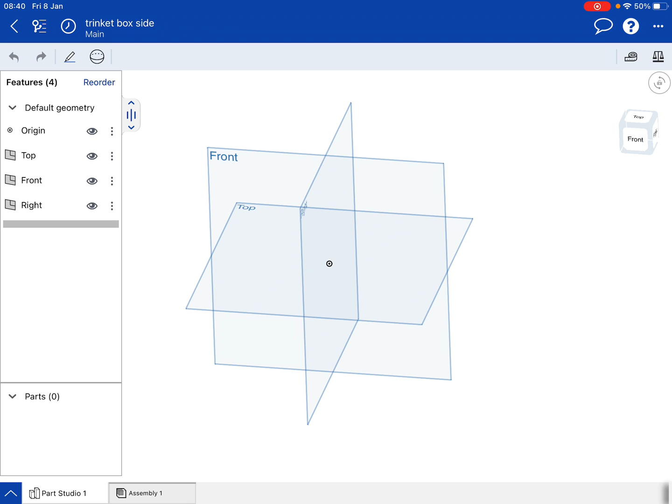Click on OK. I've not done this on the iPad, so it's a learning thing for me as well. Okay, so we've got our default geometry that we can spin around. I'm going to start by selecting the front work plane and then clicking on the sketch tool. So I'm now doing a sketch on the front work plane.

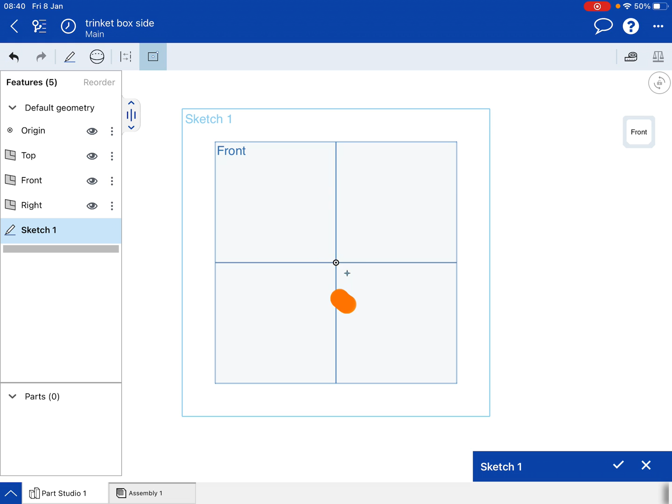I'm going to swing the view by clicking on front, so I'm looking directly at it. I'm going to start by drawing a box from the center using the center point rectangle tool. With the iPad you have to move the cross to the little dot that's right on the center, let go, and then drag out the shape.

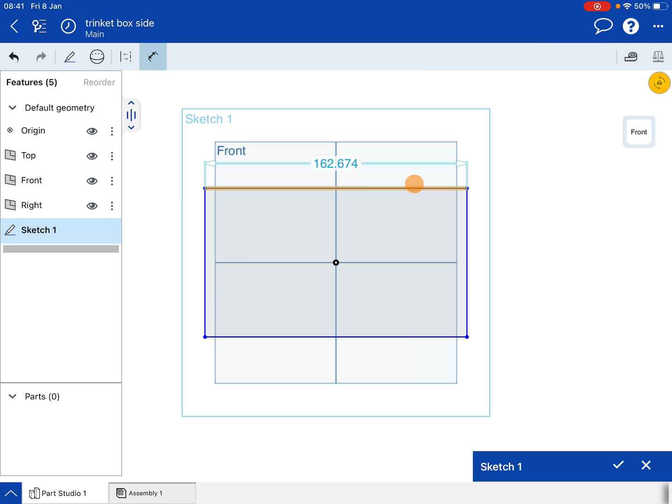Now the difference between the iPad and the PC is that you don't get the dimensions straight away, you need to dimension them next. So I'm going to go back to my pencil icon and choose the dimension tool. I'm going to click on the top line, and that gives me the dimension above it, saying 162. Click on that once and it gives me the dialog box so I can change it. We know this has to be 120 millimeters. Green tick, and there it is.

I'm then going to click on the side line here, and that comes up with 68.124, which isn't bad considering I wanted 68, so I'm quite close, but I'm going to click on that. Again the dialog box appears, change that to 68, green tick, and there we have it.

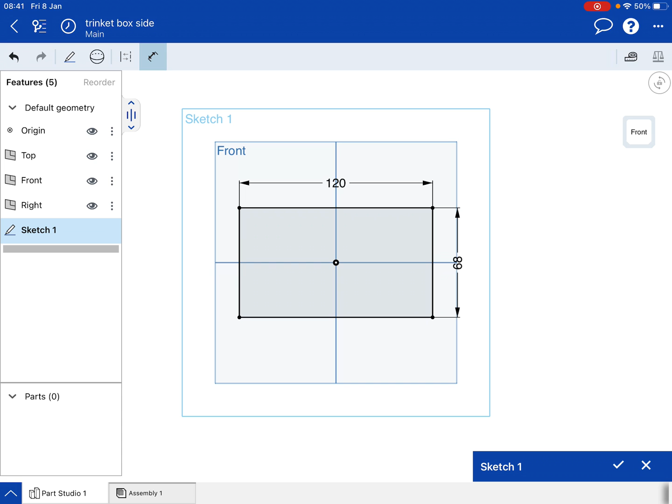Okay, the object's dimensioned. I'm going to zoom in so I can see more clearly, and drag this over so I've got it more central. There we are, okay, good.

If you find the toolbox on the left-hand side is in your way, you can click on that button on the side, and that should move it over so you've got more space to work with. Okay, so now we want to actually draw the teeth for our object.

We're going to start by drawing a construction line to give us the spacing of the depth of the teeth. I'm going to go to the pencil icon, choose the line tool, but also choose the construction line tool, which is the one next to the circle here. So I now have two tools selected. I'm just going to draw a line going vertically from there to there, and that's drawn.

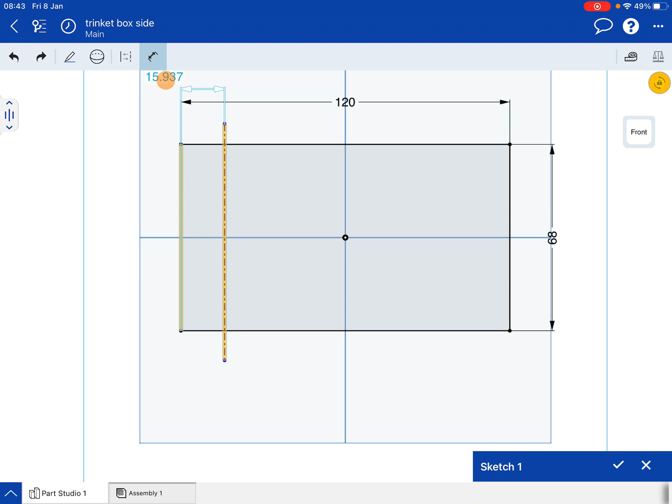What I don't know is the distance from the edge, so I'm going to go to my dimension tool. Click on the outer line, click on the construction line - oops, that didn't work, let's try that again - there and there, that's it, and there I have my dimension, telling me it's 15.937. Click on that tool, change that to 14, green tick.

Okay, now I'm going to use my line drawing tool to draw some vertical lines. I'm going to do one roughly in the middle, so from there to there. Click off the tool, click back on it, so it's like pressing escape on the PC. There and there, and I'm going to do one in the middle as well, so there and there. Okay, brilliant. Right, now I need to know the distance between each of the teeth.

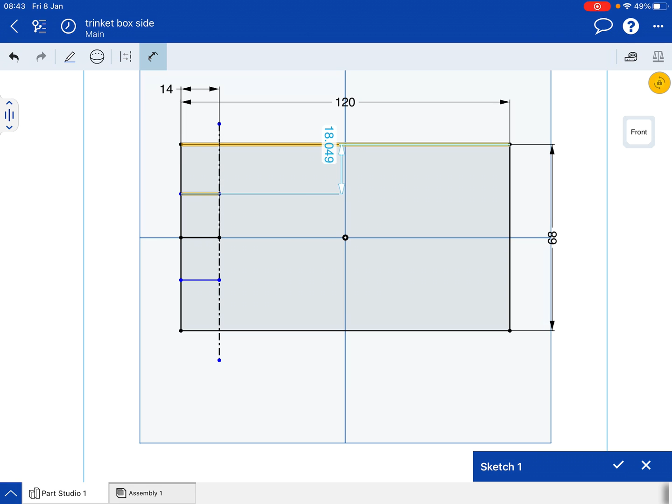So I'm going to use my dimension tool again. Dimension from that top line to the middle, to that line there. And that's telling me that's 18.049. Let's change that to 17.

Green tick that. Then do the same dimension for the bottom line to the one above it there, drag that over and click on it. And that is 17 as well. Remember, it's 68 divided by 4, so 17 plus 17 plus 17 plus 17 gives you your 68.

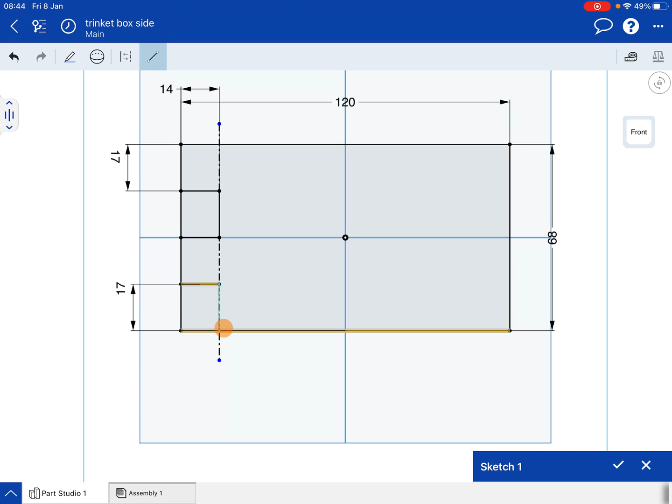I'm now going to add some extra lines in this, so take my line drawing tool, and I'm going to fill in the middle here, coming from the first tooth down to the second, to the mid tooth, from there to there, and from the top of the bottom tooth to the end there, because now I can chop out sections that I don't need.

So click on the pencil, click on the scissors, which is there, trim, and then lose lines that I don't need. So I don't need that line there, and I don't need that line there, and I also don't need that line there, so that can go away. Brilliant. Okay, so I've got one side of my tooth created.

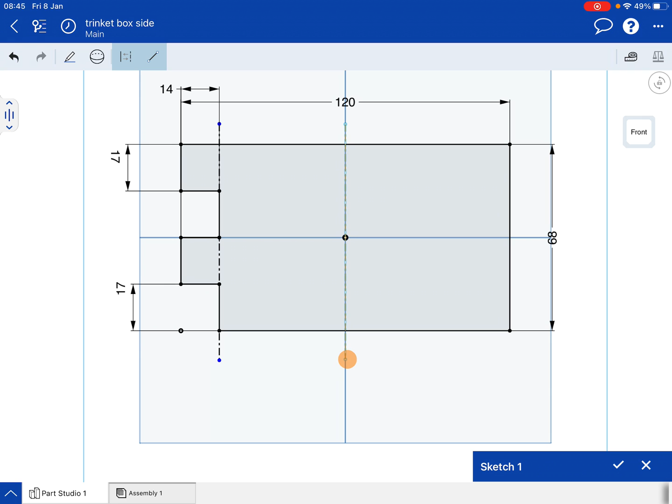I'm now going to go back to my line drawing tool and pick the construction line. I'm going to draw a line through the middle from under 120 down, there to there, going through the center. This is going to act as a mirror line, so we can mirror the objects on the other side.

So I'm going to click on the pencil icon, choose the mirror tool. Let me find the mirror tool, which is, where is that? I can't see the mirror tool. Oh yeah, the mirror, there we are. Select the mirror line, which is the center line that I've just drawn, there. And then select the entities that I want to mirror.

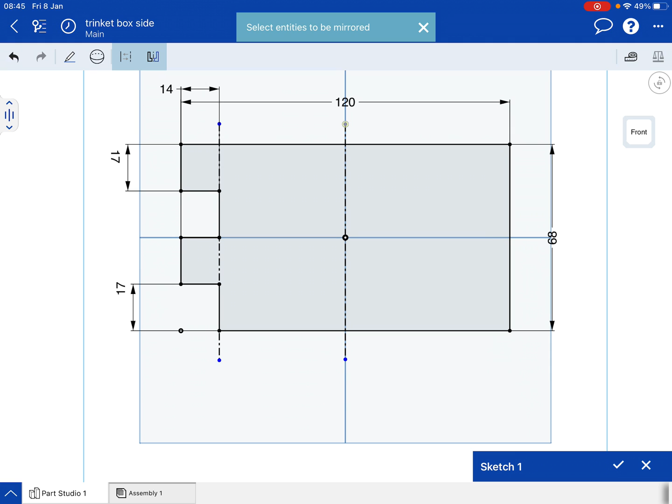So I'm going to mirror the horizontal lines that I drew, one there. Oops, hang on, mirror line there, that's it. And that line there, and that line there. And I'm also going to select the construction line that we drew there as well.

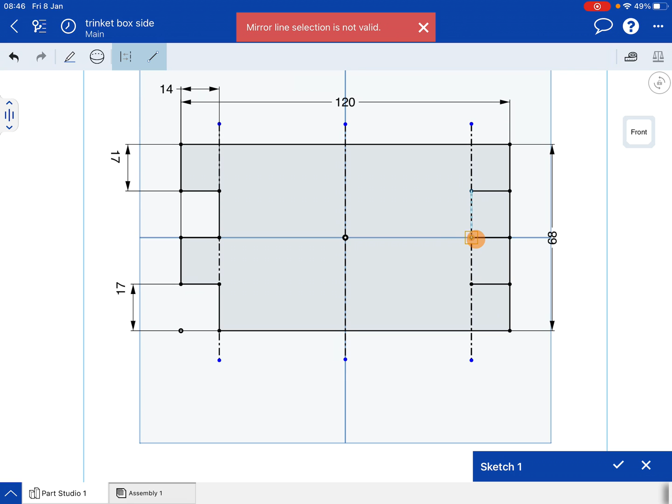Now I'm going to add in some fill-in lines like I did before on the other side, so from there to there, and from there to there.

Now take my trim tool, trim out sections that I don't want, so there and there and there. And I should have, oh hang on, I'm missing one fill-in line from there to there. That's it, I think, a complete shape. That looks like a complete shape to me, okay.

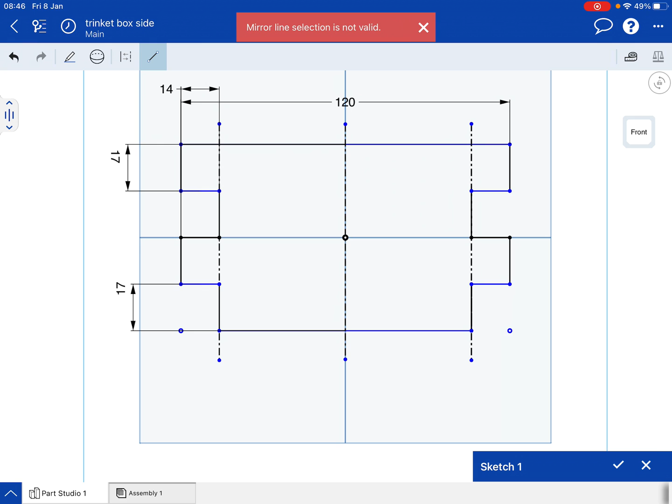Right, that's fine, okay, don't know why that message is there. Now let's just swing that around so we can see the object that we've got here. Let's deselect that.

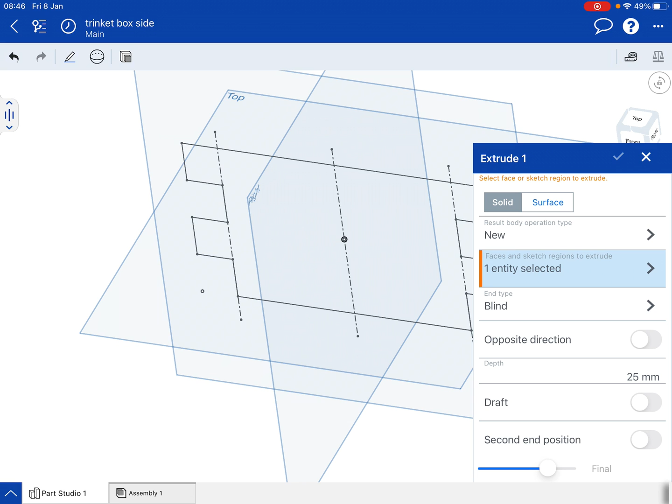And that should extrude out, so now I'm going to choose my extrusion tool. Extrusion. Okay, I've got one error somewhere, let's see which is that. Must have an error somewhere. Where is there an error?

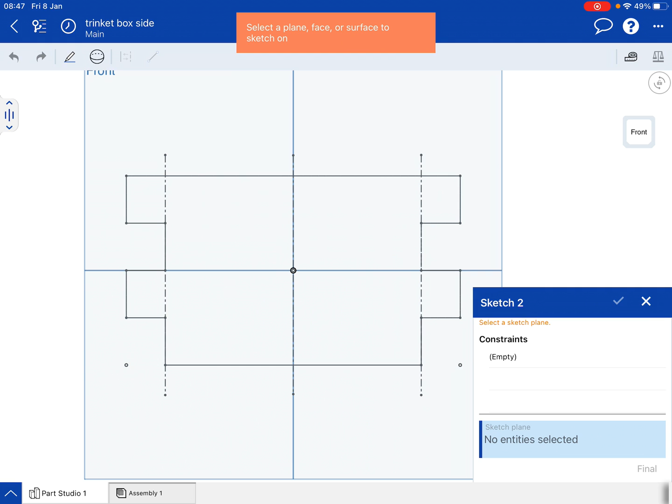Oh, I can see, yeah, I haven't got a construction line from there, so let's look at the face first. Get back to this, edit. There we go, that's right. I haven't drawn a line from there to there. That's it, there you go.

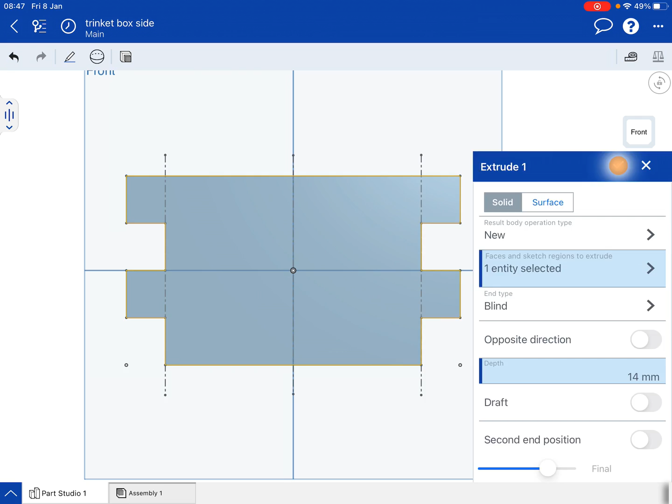All right, now then I can go to my extrusion, there, that's made it to a solid shape now. Yep, and I set that distance to be 14 depth. Okay, there, and there I have my 3D shape there. So the problem was that I'd missed out a line on the right hand side there, and now it's been constructed there. So there is my first part created.

Okay, ready for the next part of the assembly.